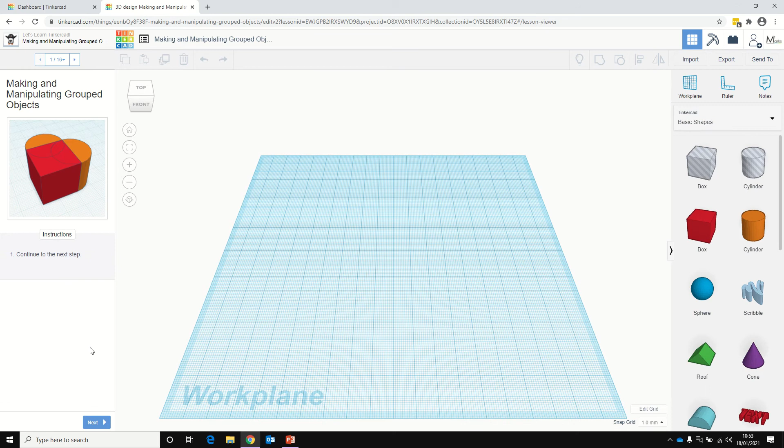Let's let that load up. So I'm starting at step 1 there. First step, straightforward, we're continuing to the next step there.

It's giving us a wee introduction. You can read that on your own.

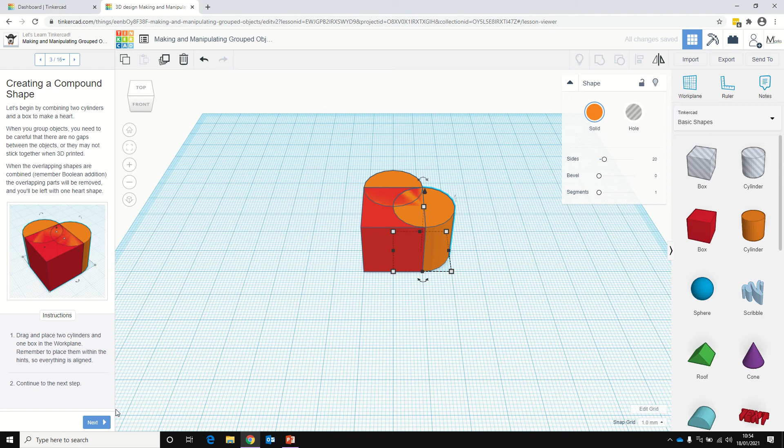Now it's asking us to drag 2 cylinders and 1 box. So I'm just going to zoom in a little bit. Grab the box, line up where they've asked for the silhouette, and the cylinder in there and the other cylinder in there as well, and click next. Now it's asking us to hold shift.

I'm holding shift there and selecting all the items. Items selected, so I've clicked on those while holding shift, and then we're grouping those there. You can see those items have now grouped, and it's changed to one color.

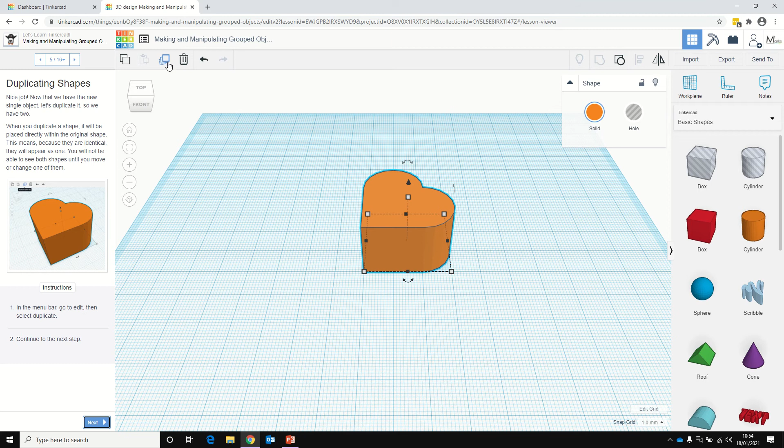Now in the menu bar, it's asking us to go to edit, which we've got edit up here, and then select duplicate. So we're duplicating that there, and we're clicking next.

Now it's asking us while holding Alt to grab the height handle and make the shape taller. So holding Alt, we're making the shape taller there.

There we are there. You can see that's in line with that top silhouette. You can just see that there.

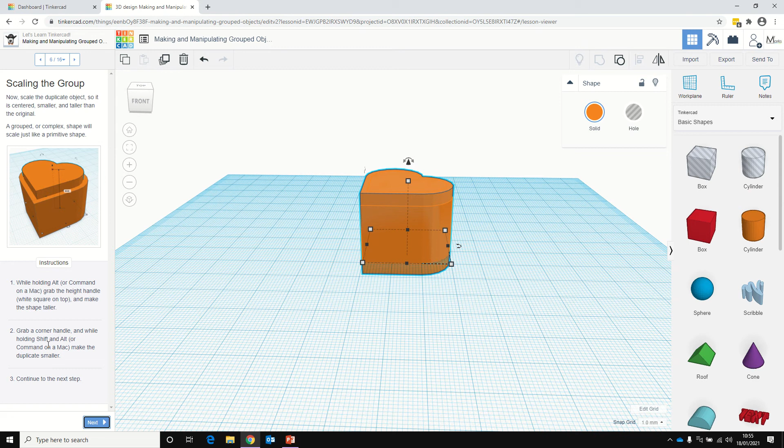Now it's asking us to grab a corner handle, and while holding Shift and Alt, make the duplicate smaller. So we're going to bring that in, so it's the same outline around the top there. I'm going to click next.

Now it's going to change that to hole, and then we'll click next there. Then we'll select the outside heart, and we're going to group that there, and there we have it.

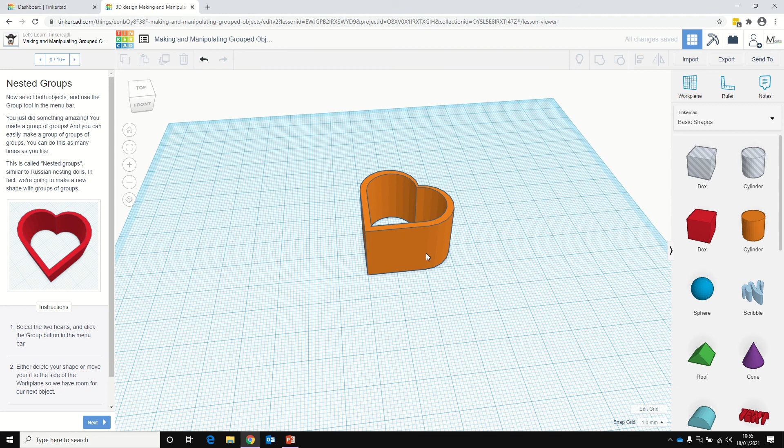And if you want, you can change the color of that to red, and it matches the example shown. Now it's asking us to move that one out of the way, so we don't need that for the next step.

So now it's asking us to add a box, the roof up here, and then move it up 20 millimeters.

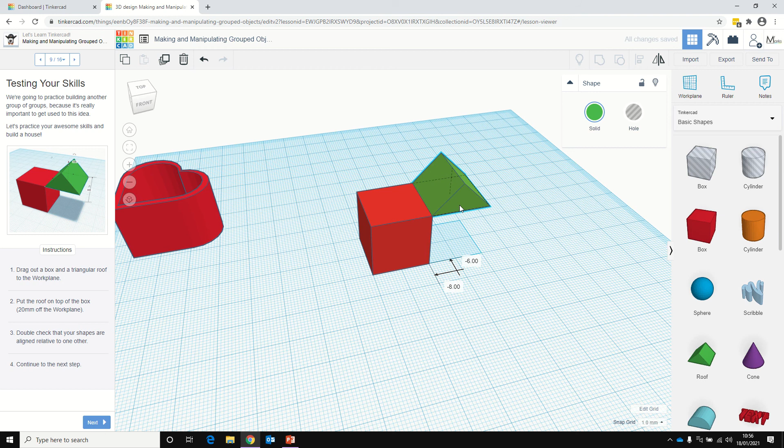So we'll move it up. There we are, 20 millimeters. We'll move up 20 millimeters, and then it's asking us to align relative to each other. So we'll put that in there.

And these are lined up. Then I'm going to change the color to my house. I'm going to go for a nice dark red roof. I'm going to go for a light blue building, and click next.

I'm going to hit group the objects, and you click on the first one, hold shift and click on the second one, and then we're grouping the objects there.

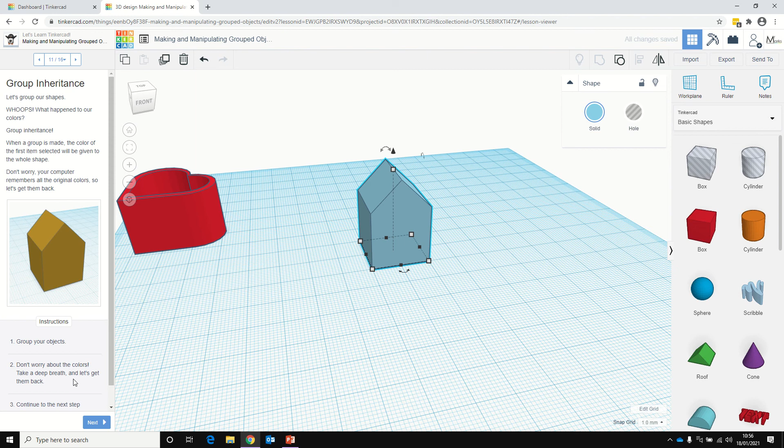It says don't worry about the colors, take a breath, let's get them back. Continue to the next. So what we can do is we can click solids, we go up here and click multicolored. That brings back the colors we originally chose.

We can click next. Now it's asking to scale our house, so we're dragging that out this way here. We are to 50. Now it's asking to duplicate the shape, so we're at the duplicate button, and then we're going to rotate that round.

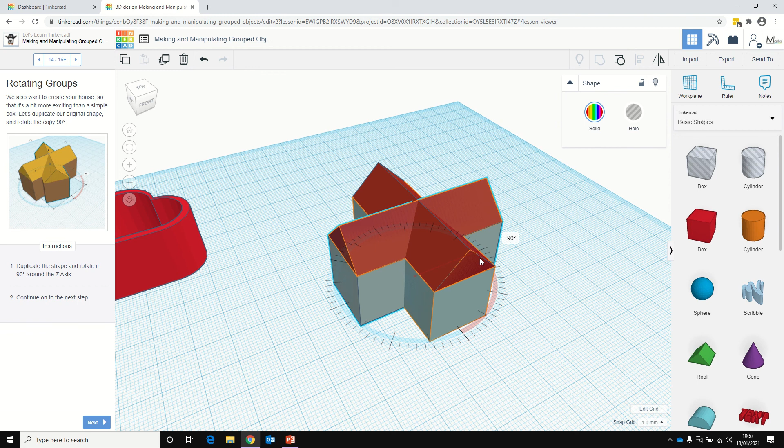And rotate it on the inside, right on the inside, and it moves round at 22.5 degree intervals. Move round, we'll click next.

Now it's asking us to make that part there 25 millimeters long. So I start dragging it in. What I'm actually going to do is I'm going to type this. Once I click on the dimension, type that there, and there we have it.

Now it's saying you can customize your house. Before I customize it, I'm going to group these two parts of the house there. Remember, you can always ungroup it if you decide you don't want that. I'm going to group those two together.

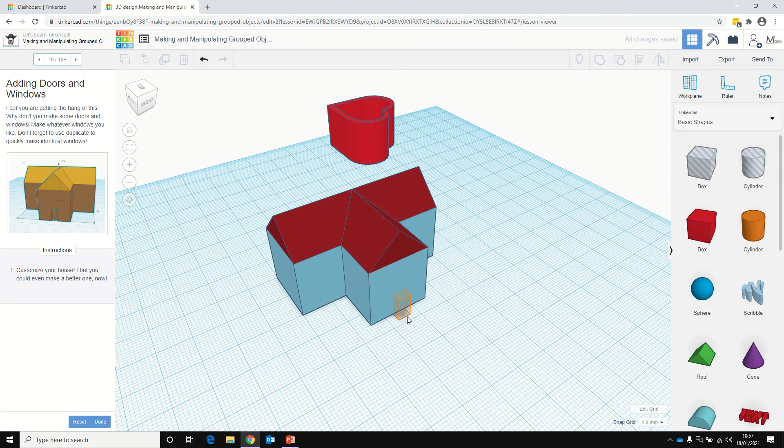Next, I'm going to add a doorway. So I'll just show you how to add a doorway. I'm going to grab the box tool. And I'm going to shrink that down so it's the same size as that box they've got.

A little bit in that way a little bit. There we are. And then I'm going to group those. I've got my doorway added there.

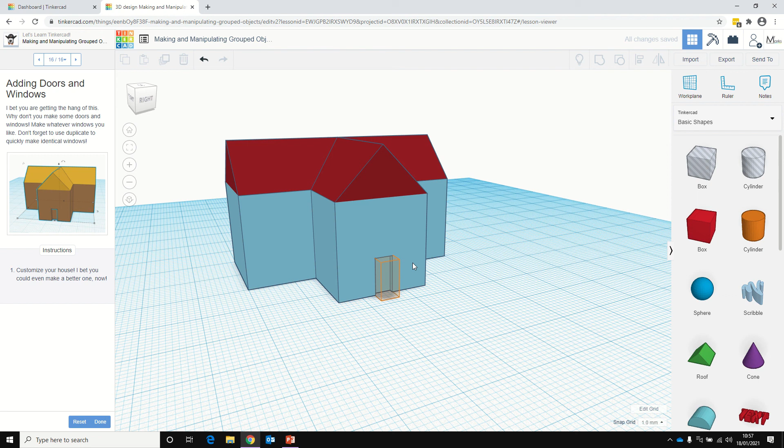And that orange box is just remaining because that's where they've had that silhouette. If I move the house out of the way, you can see I've got my doorway there.

So that's you've completed making and manipulating grouped objects. You're going to have a go at the next tutorial, which I've recorded a video for.